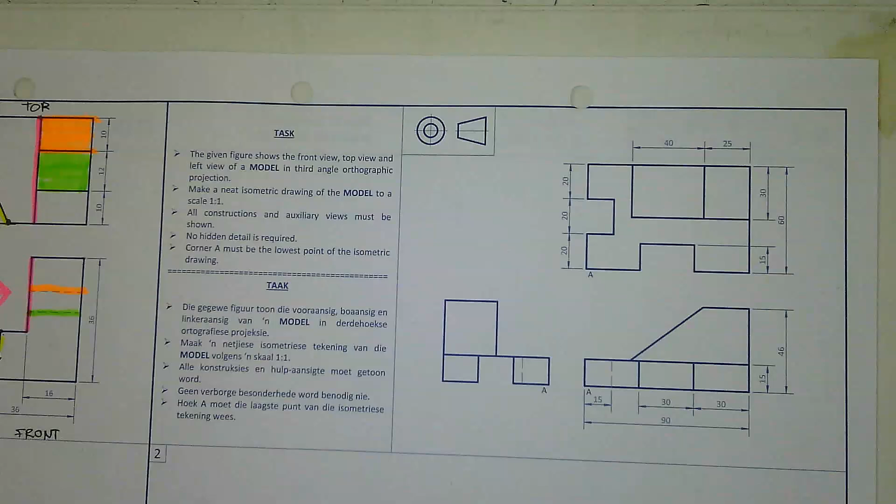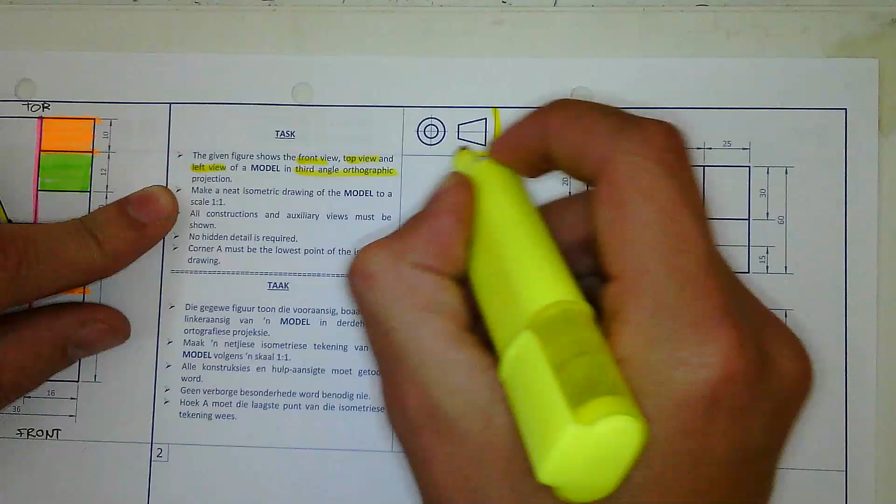Yes? Say again. 7-4, yes. HSE page 7-4. Okay, let's read through the question quickly. They've given us a front view, a top view, and a left view in third angle orthographic projection, and again there is your symbol. Now I want you to please answer this question for me.

Which one is my front view, my left view, and my top view? I'm going to label them A, B, and C. Which one is my front view? A. Which one is my left view? Which one is my top view? Okay, so everybody's happy? Okay.

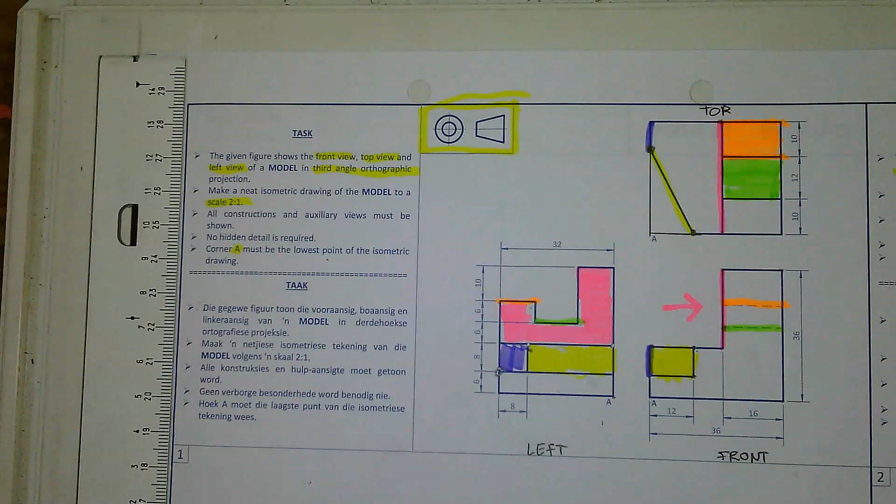Now, they've also told us that we must make a neat isometric drawing to a scale 1 to 1. Scale 1 to 1. I want you to notice, please, on this page, on drawing number 1, you use a scale of 2 to 1. Okay, so when you draw that one, just take note of that.

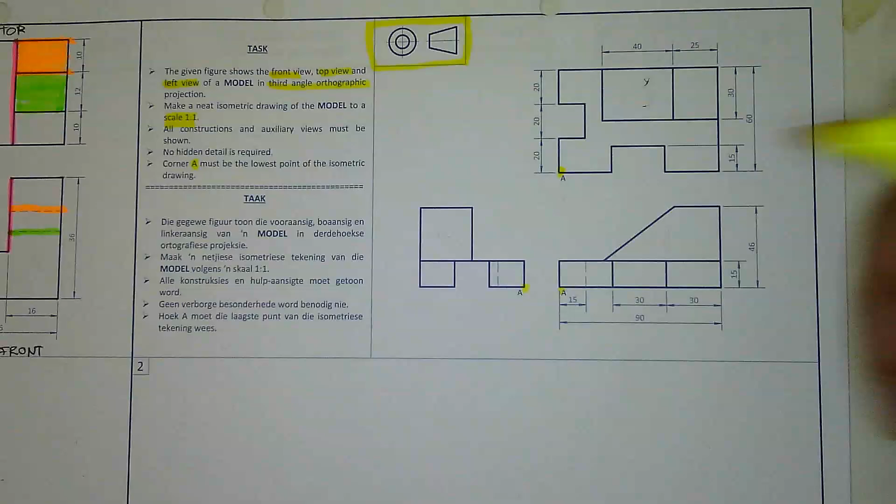And then they want us to show all constructions and auxiliary views. No hidden detail is required, and corner A again must be the lowest point in our drawing. There's corner A, I've just tapped it, so there, and there, that is where corner A is.

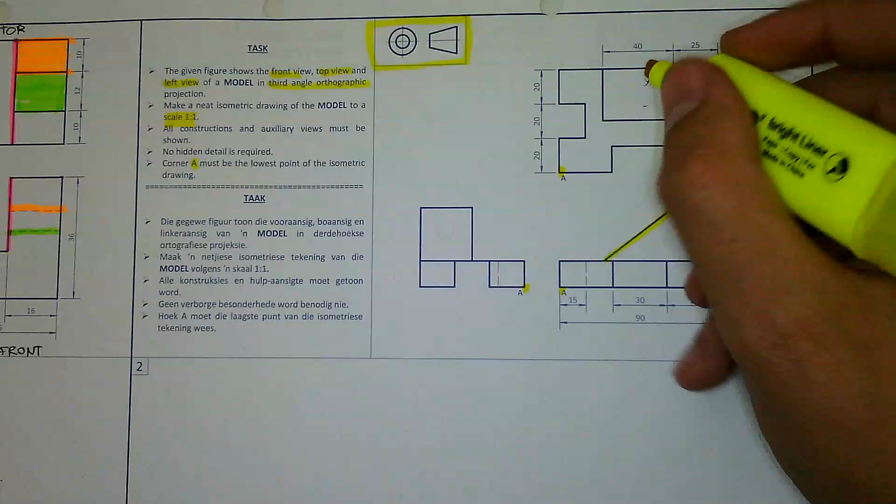So let's quickly look at our front view. So in our front view, we see two things. We see a slope, and we see the top part of that slope, right off the bat. So that slope is going to be where in my top view? It's going to be right there. Do you agree? That top part right there is going to be that flat surface in my top view. Do you agree?

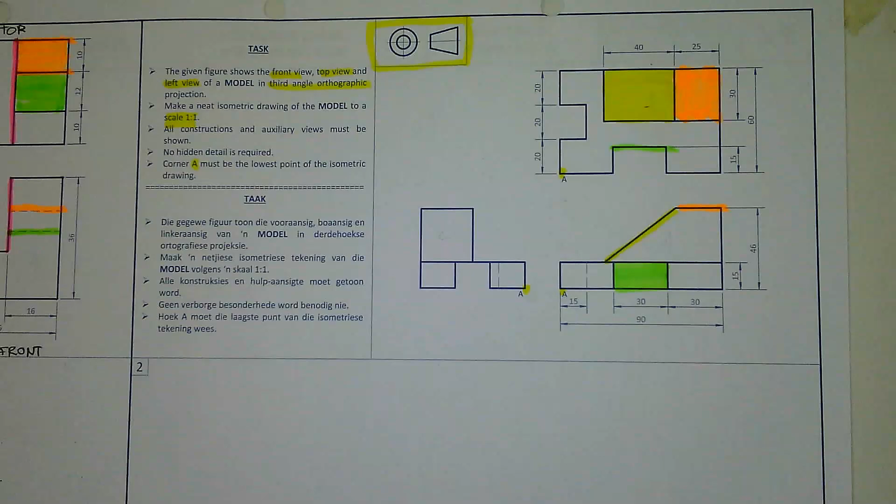Now, quickly pay attention to this. This surface right there, it's like a punch out almost. The line for that is going to be there in my top view. Do you agree? And then if I take my pink, those two lines, where are they going to be in my front view? They are going to be these two surfaces. No. So those two surfaces. Those two surfaces.

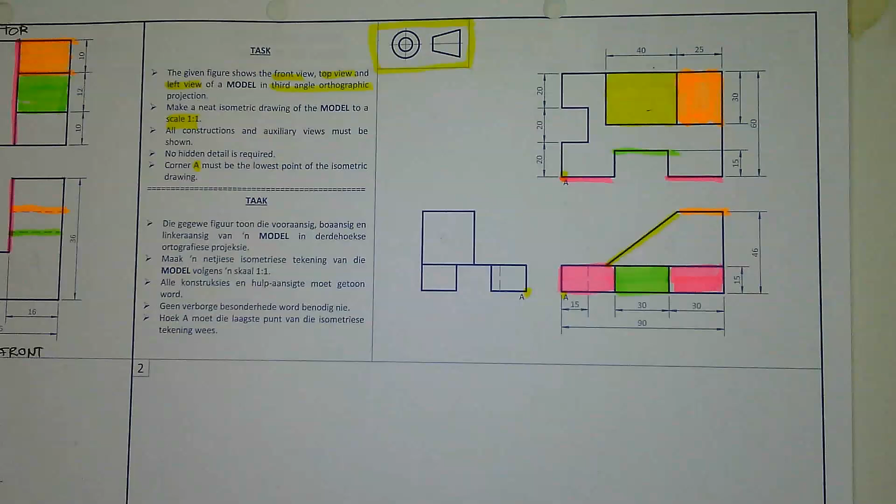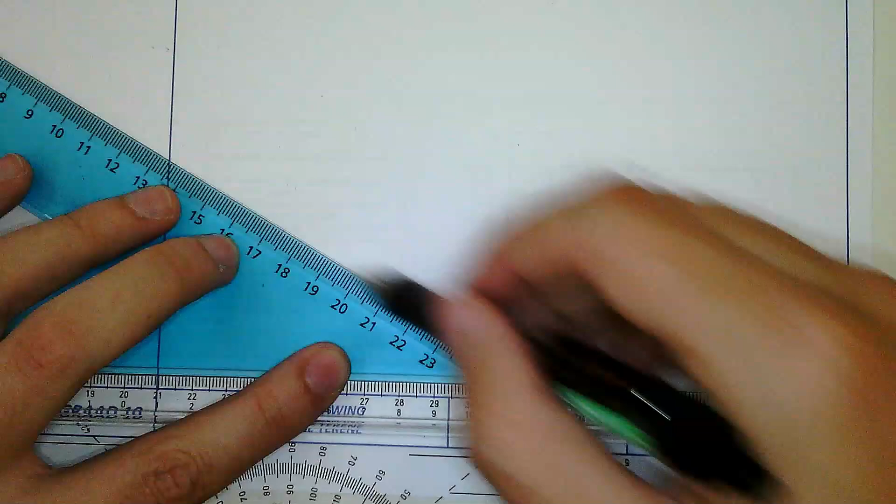Okay, so I'm going to stop there for now, and then I'm going to start drawing. So I'm going to go to point A quickly. Remember, all of our isometric drawings start with a 30-degree line going up and to the left and up and to the right. And then we have a line going straight up. So if I stand right there, I have to see my front view. If I stand and look at it from there, I'm going to have to see my left view. Everybody happy? Okay.

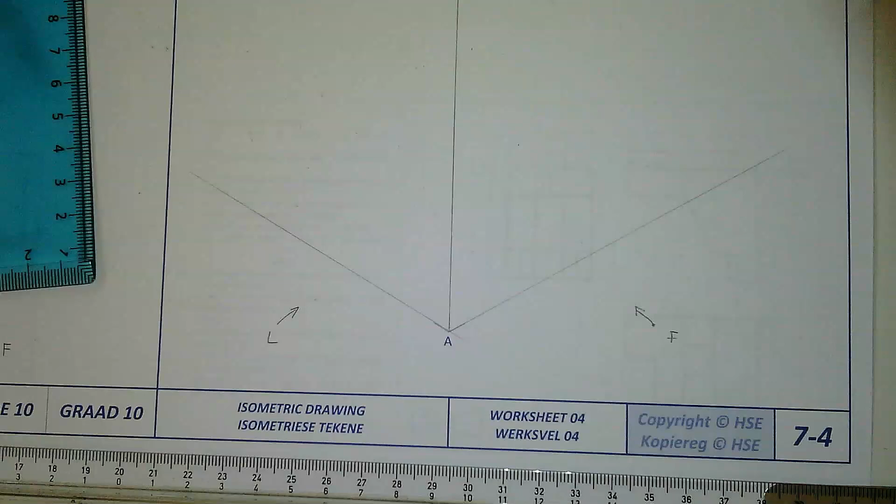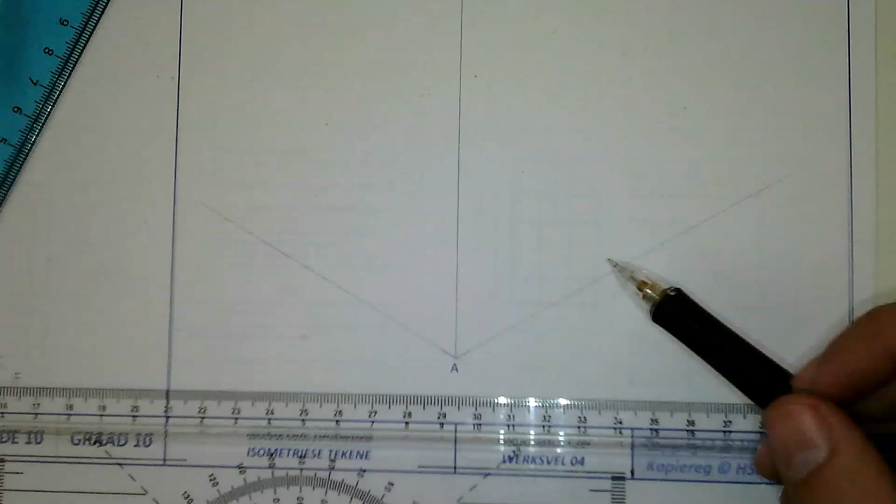Alright, so now I'm going to start with my front view. Where's my front view going to have to be? You said it's going to have to be somewhere on this side. So our front view has to be somewhere on this side. So the first thing that I'm going to do is go to corner A, and I'm going to draw that surface right there. I'm going to get the height of that surface first.

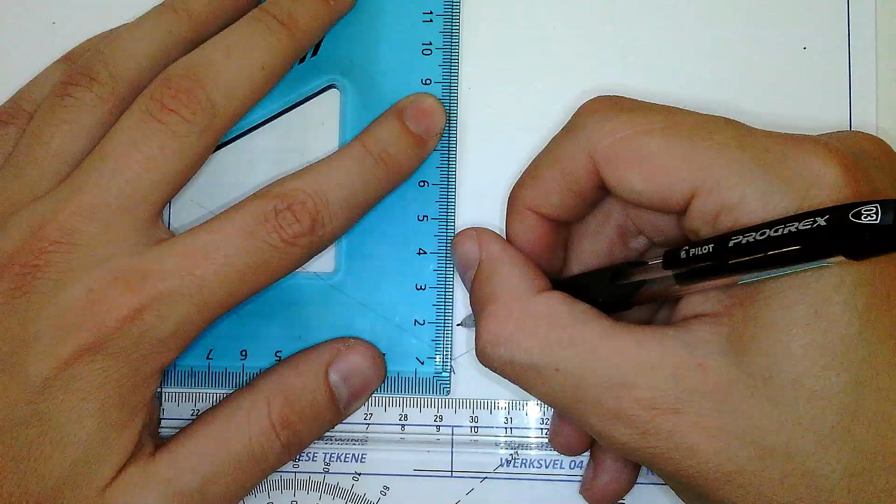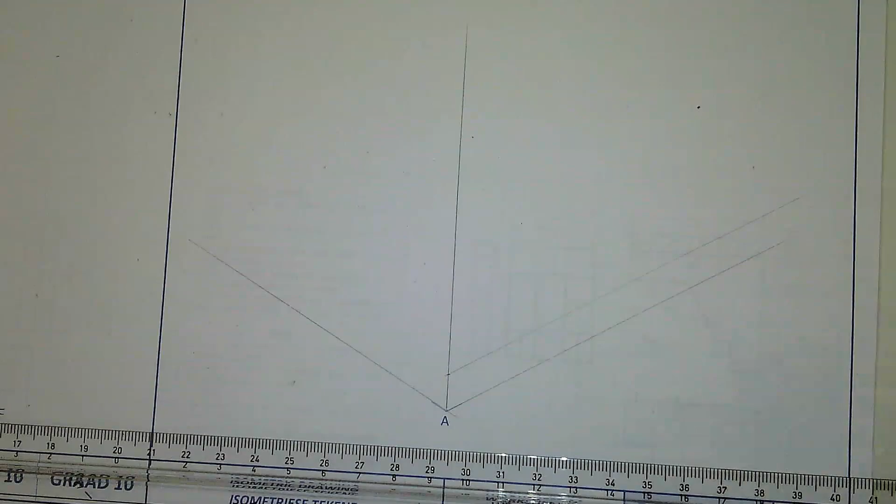What is the height there? It's given as 15. So I'm going to go to the base right there, and I'm going to measure 15. Make a mark right there, and I'm going to extend that mark up and to the right. Now, what is the total length from there to there? 90. Okay, so I'm going to measure these two lines to be 90. One, two, three, 4, 5, 6, 7, 8, 9. 90 right there.

Okay, so let's start with those two pink surfaces right there. They are both given as 30. So how do I know this one is also 30? I can just double check it because if I take 90, minus 30, minus 30, what's going to be left? 30. Okay, so both of these have a width of 30.

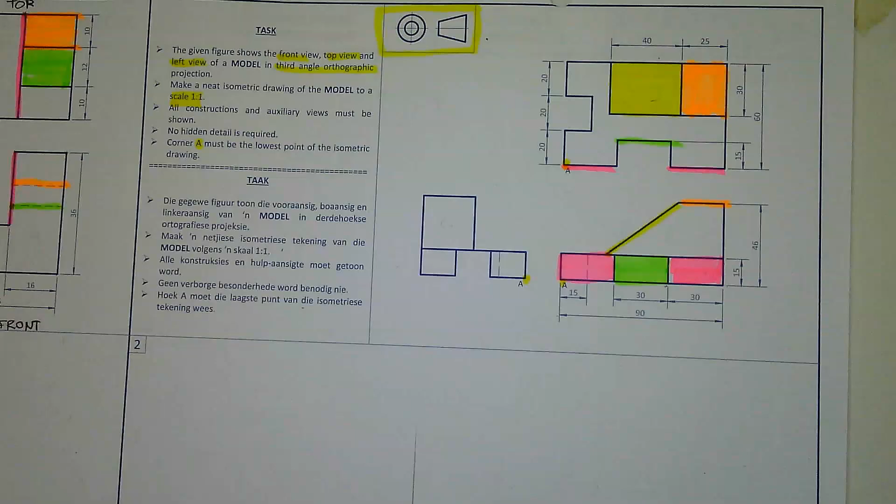So I'm going to go to that corner, measure 30, and I'm going to go to that corner right there and again measure 30. And I can draw lines down from them and I can make these lines hard. See that?

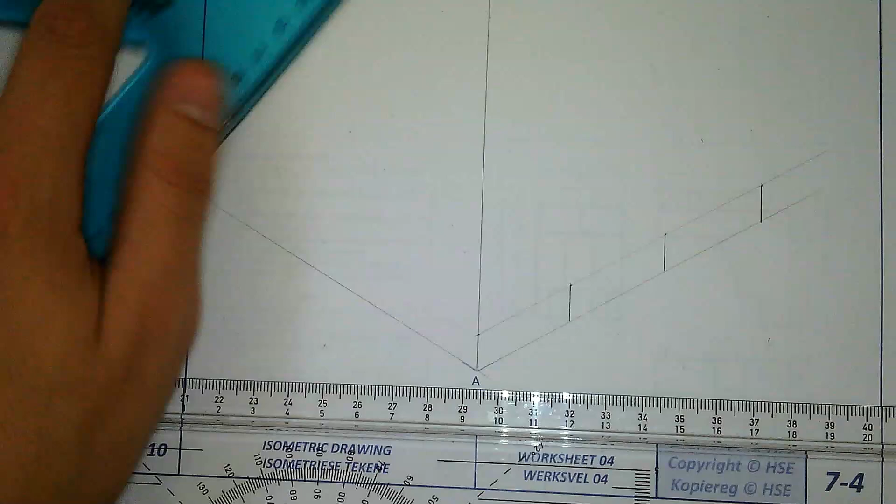Okay. So I have these two surfaces. I have those two pink surfaces. They are there. I can draw them in with a hard line. They are permanent. Everybody's happy. Now I want to quickly have a look at this punch out right there. How am I going to get this punch out?

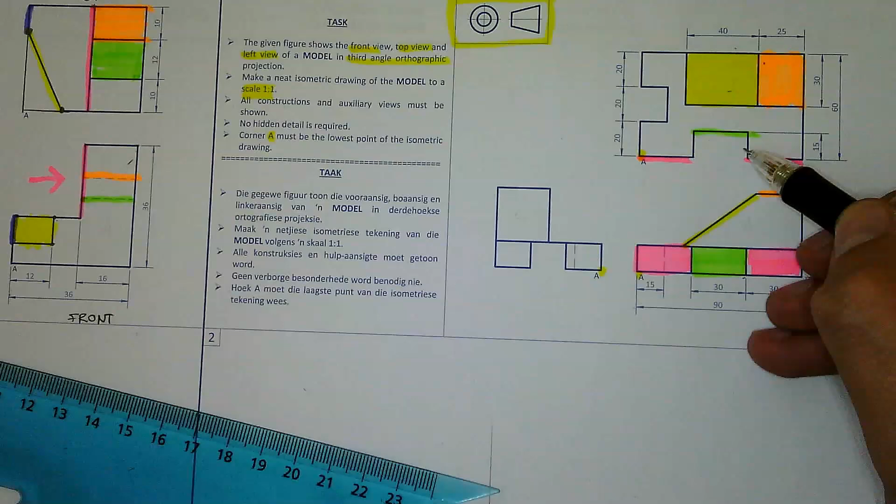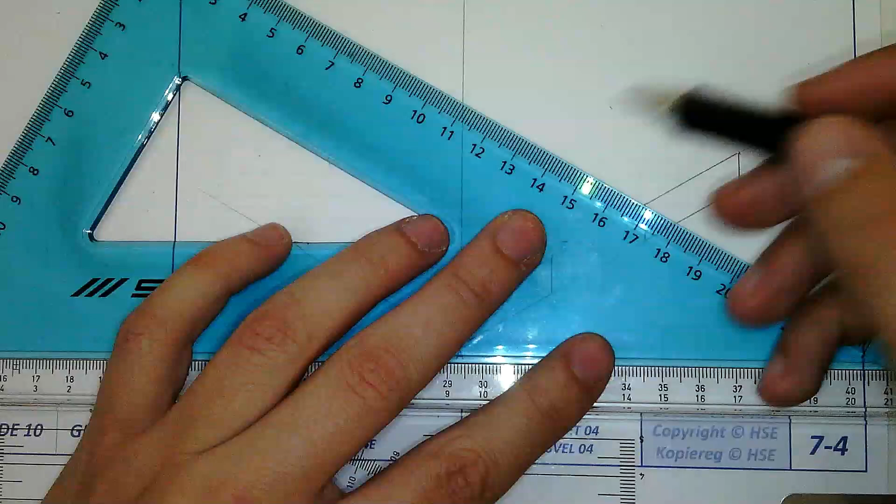It's given to me with a depth of 15. Okay, do you see that? We have a depth of 15 there. So I'm going to go to my drawing, and from that corner right there, draw a line that goes to the left. Okay, and I'm going to measure that line to be 15.

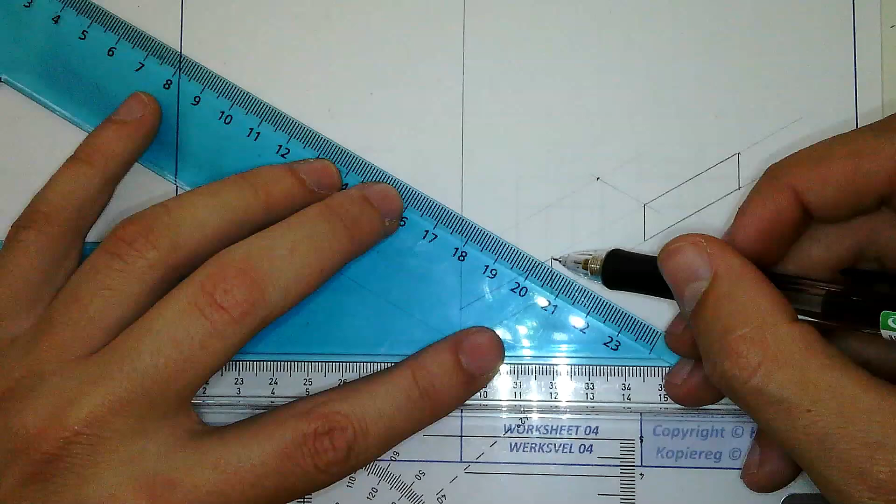So, a quick way to make sure that everything lines up without doing any other measurements. I'm going to go to that point that I've just created, extend it down into the left, and go to that corner and extend it up into the left. Can you see? Now I've connected all of those lines and I have created my punch out.

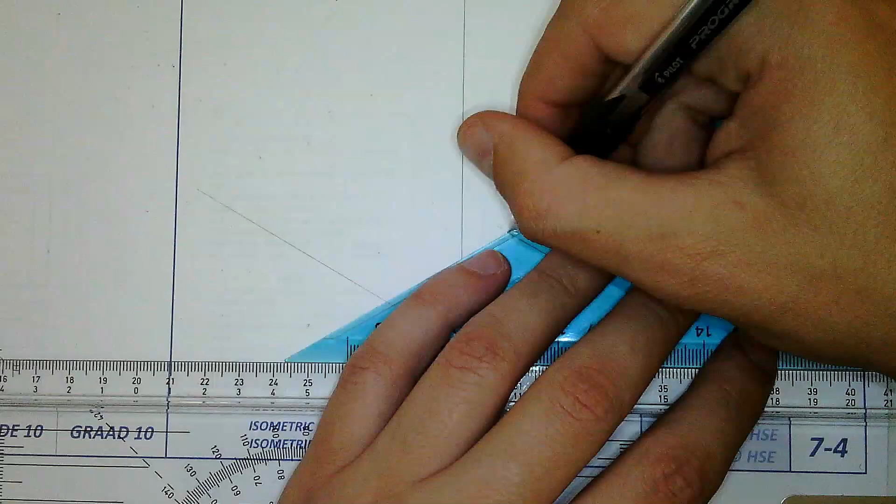How did I get 15? I got 15 from this section or from my top view. So can you see there the distance is given as 15. You see that? Okay. So now I'm going to go back to this drawing. I'm going to finish off this punch out. How am I going to do that?

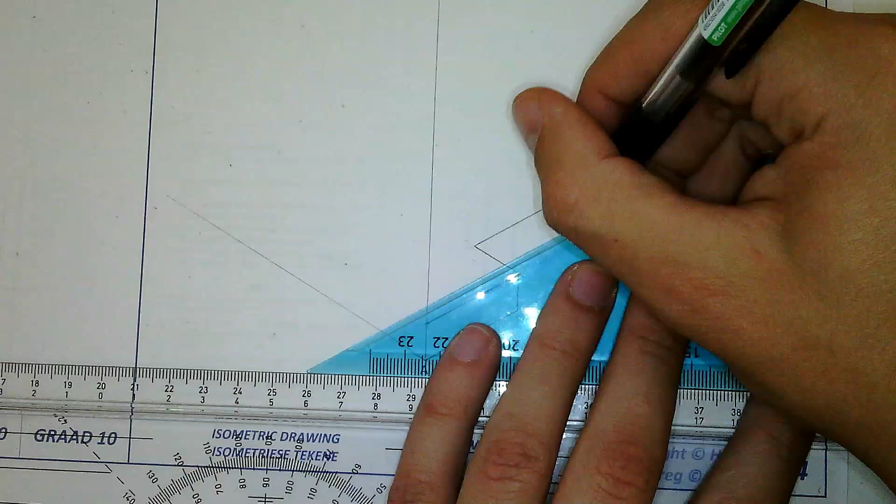From that corner, I want everybody to quickly pay attention now. From that corner, I'm going to draw a line up and to the left. And then from that corner, I'm going to draw a line straight down until they intercept. And then I can draw a line from there all the way to that line because that is going to disappear. Okay.

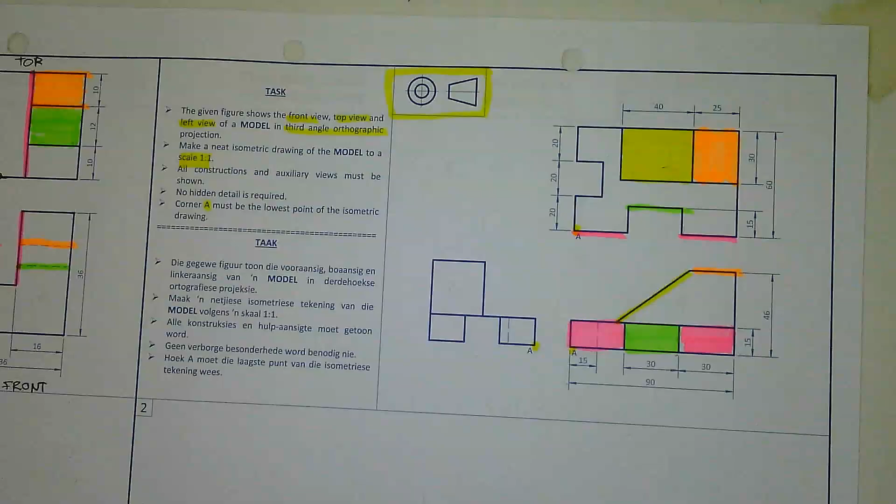Okay, so now I've created that little section right there. So I'm going to go on and draw my left view now. There's a mistake in the book. If you look at your left view, there should be a given line there. So you can just add that line in your left view.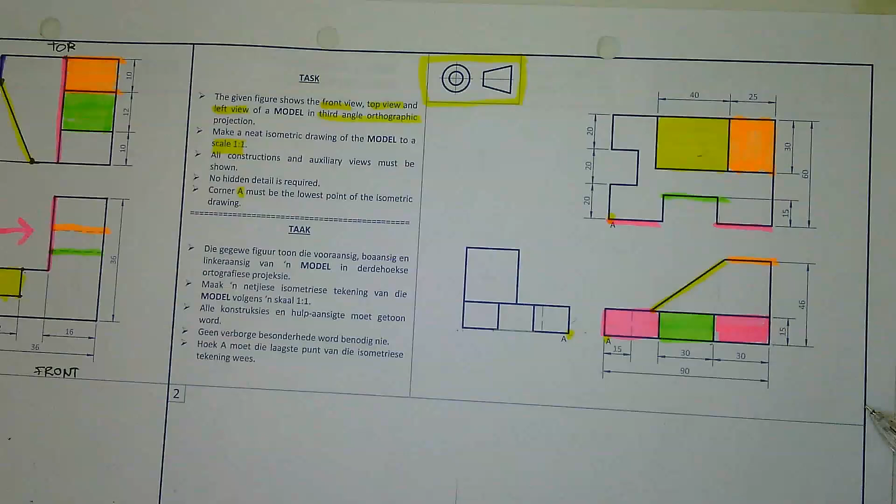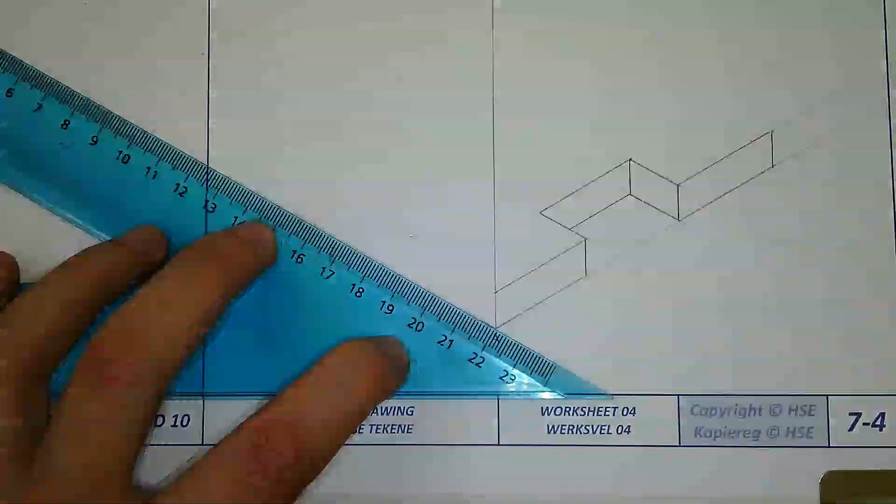Okay, so for my left view, what is the total length from there to there? What is the total length from there to there? 60, yes, because the length from there to there will be the same as there to there. Alright, so I'm going to go and measure 60 on that line. One, two, three, four, five, six. 60 right there.

While I'm here, I'm going to create all of these points. Look at all of these points quickly. They are spaced 20 mm apart from each other. So I'm going to go back to this line, there where I started to measure, place my ruler back at that spot, and I'm just going to make marks in 20mm increments.

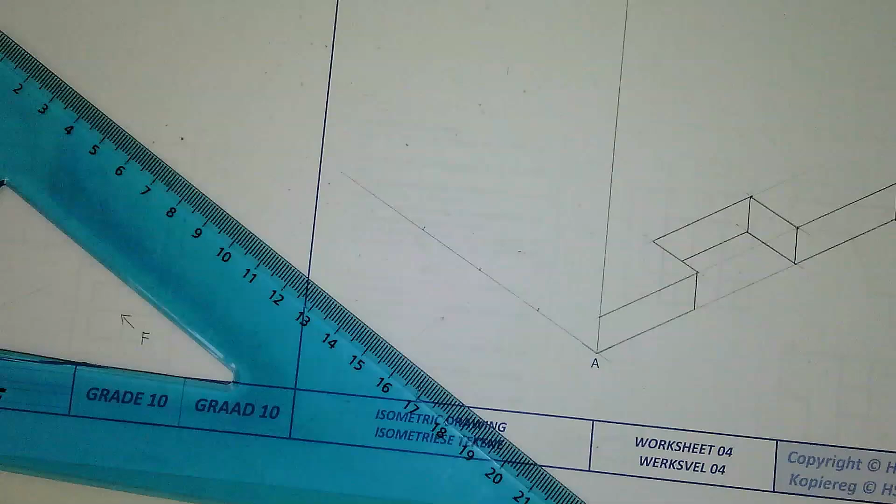And then again, to get the height here, I already have the height, because I've already drawn it in right there. I don't have to go measure anything again. So I can just go to that corner right there and draw a line up and to the left. And now I have a line indicating my height.

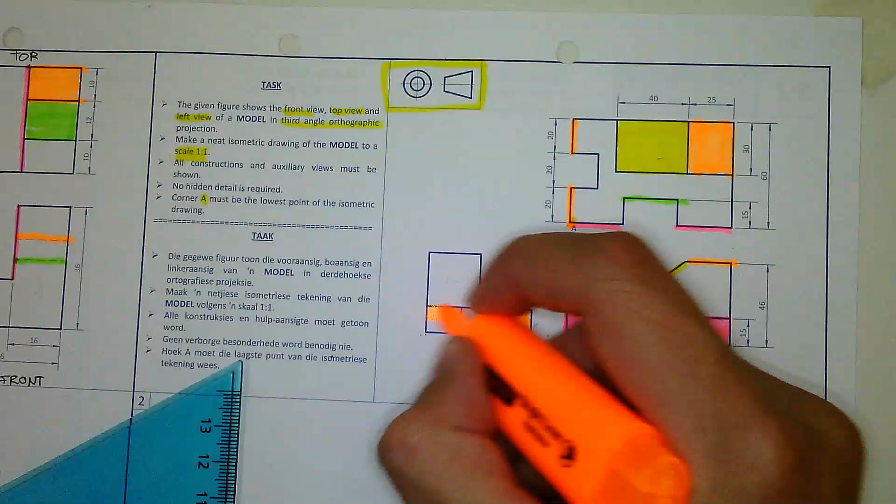Everybody quickly look at the board. Look at what I'm going to draw now. Do you see these two lines that I'm drawing in? Those orange lines. Where are they in my left view? Those are these surfaces. Do you agree? Where is that line in my left view? That will be this surface. And it's also going to be a punch out. It's going to have some depth to it.

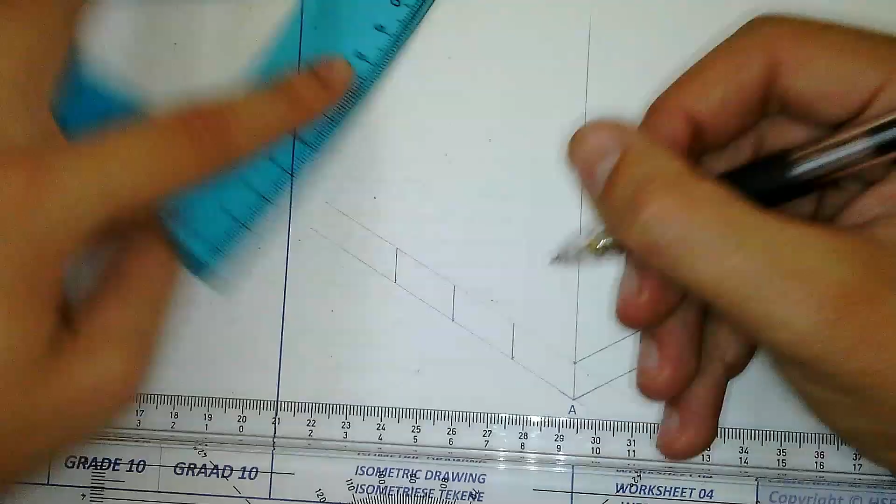Okay. So what am I going to do? I've already created those dots in 20mm increments. So I'm going to just draw a line up from all of them. Then I can create those two surfaces quickly. I know where they should be. So I'm going to draw in those lines with dark lines right off the bat. Okay, now we want to draw the punch out.

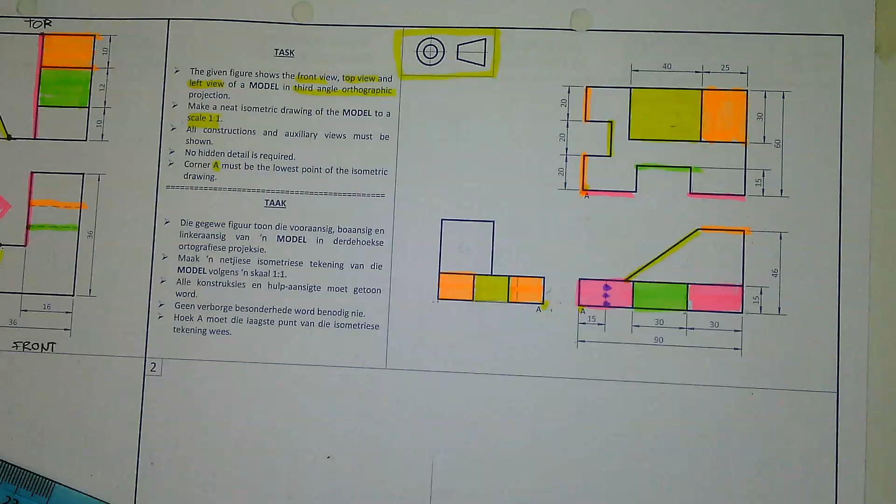This is where we're going to have to look at some hidden detail. If you look at your drawing, you'll see that you have a line right there that shows there's some form of hidden detail. That hidden detail line is going to give us the depth of that punch out. So what's the depth going to be? 15. Do you agree? So it's going to be 15 there.

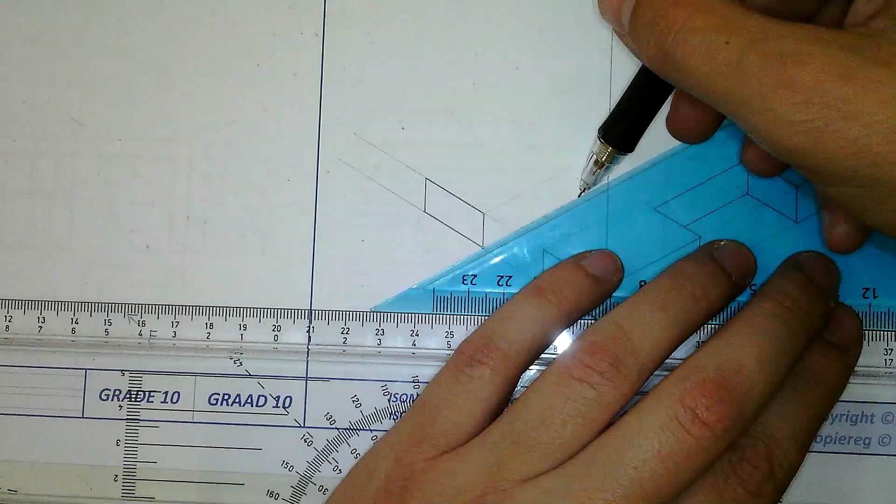So what am I going to do? I'm going to go back to my drawing, go to those two corners, and draw two lines up and to the left. I'm going to add this bottom one in as well, up and to the left. Now I'm going to go to the top one for now, and then I'm going to measure 15mm on that line.

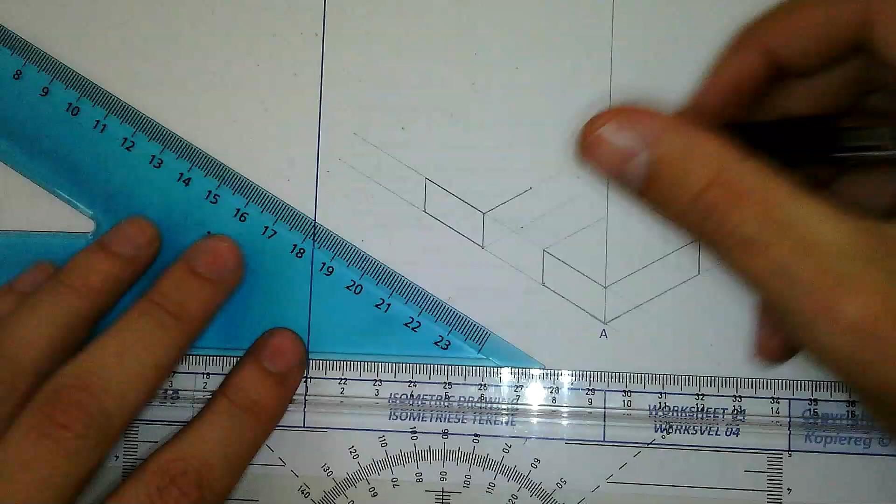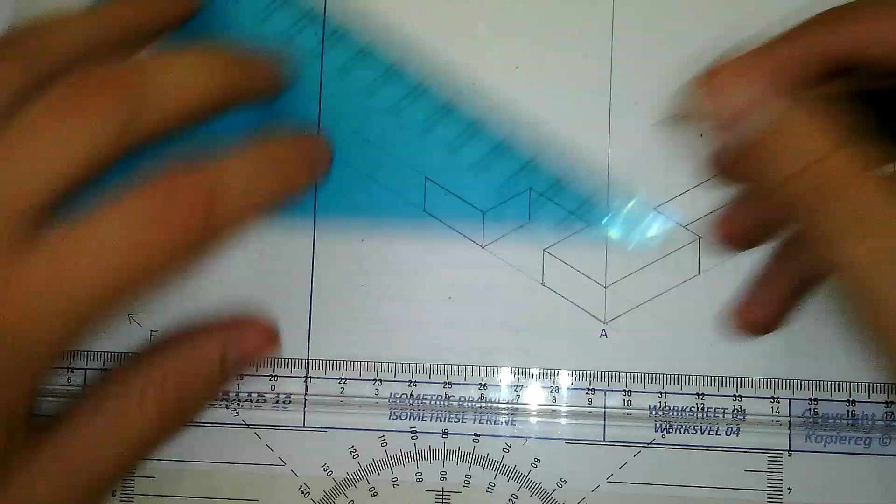Just like that. Okay, in order to close off that punch out, all I have to do is now extend that line until it touches this one that I've projected. Do you see that? And I can close that off. And all I have to do now is go to that corner, project it down until it touches the bottom line. And then I can complete my punch out. And again, this one is going to be projected until that point, and only that point, because it's going to be disappearing there. Okay, so now we have gotten somewhere.

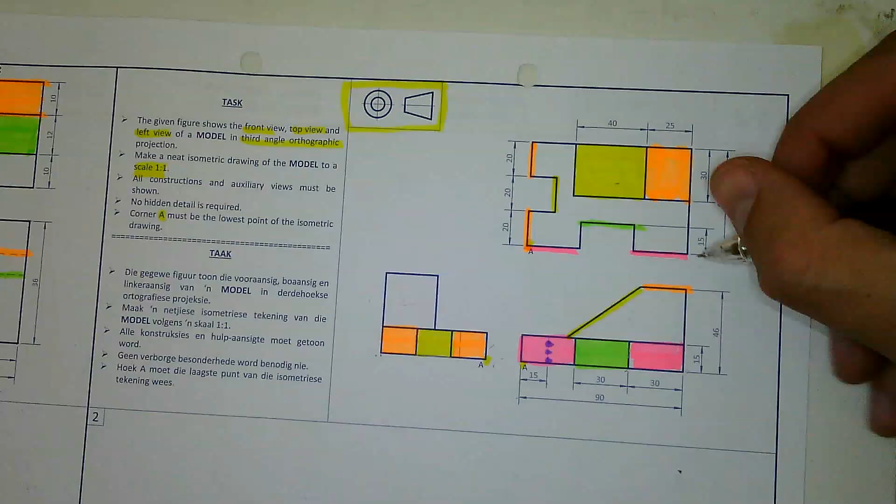The last thing that is left for us to do really is to draw in our slope. Okay, that wedge looking thing there. So what am I going to do? We have that point right there, because that point is given to us. Do you agree? So, since we have that point, all we have to do is find the distance from there to there. Do you agree? So, how are we going to find that distance? It's going to be 60 minus 30, which is going to be 30.

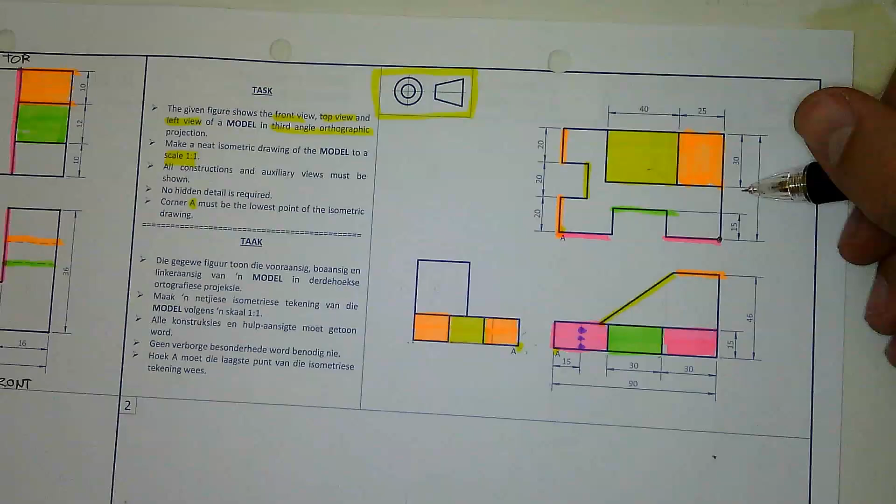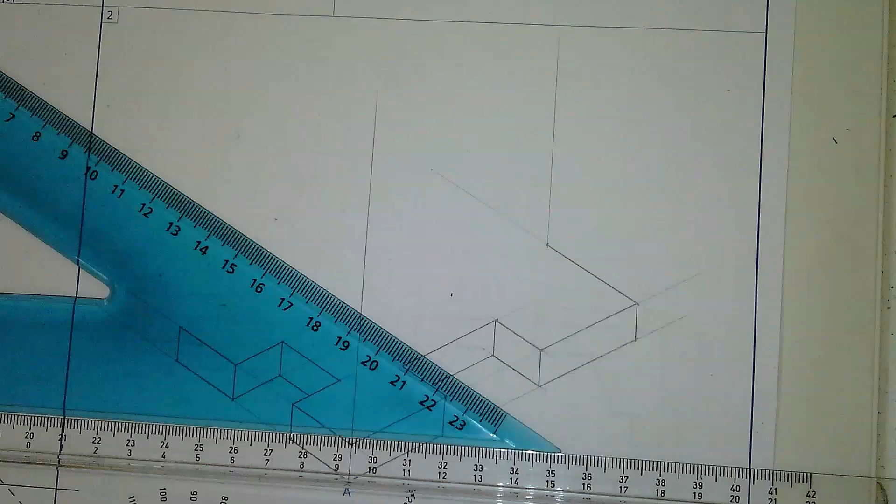So, what I'm going to do now is I'm going to go to that corner and I'm going to draw a line up and to the left. I'm going to measure that line to be 30. And I'm going to draw a light line going up from there. You'll see why in a second. Okay, so now I've drawn in that line. Remember that line that I've just drawn in, the one that goes straight up? Why have I drawn in that line? Because I can now draw that line right there in my front view. Okay, I can get that line.

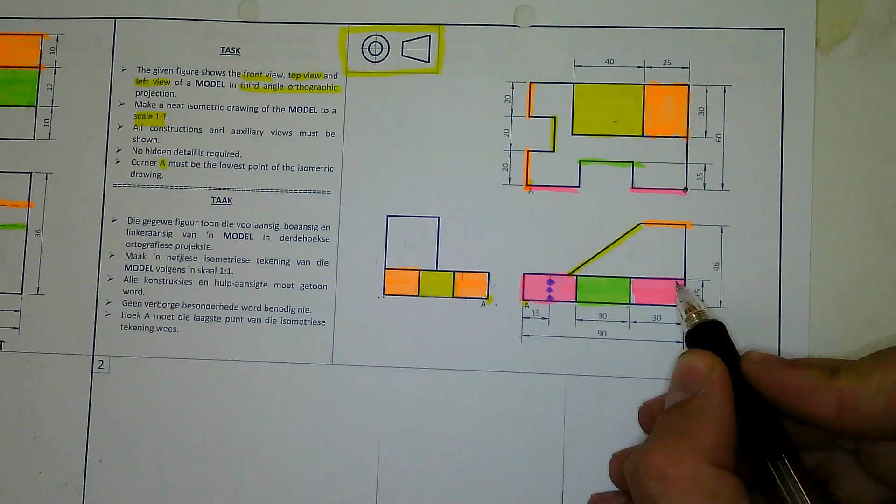How am I going to get that line? It's going to be 46 minus 15, which will give me 31. So I'm going to measure 31 on that line. And I can draw it in with a hard line for now. Quickly look at what I'm going to do now. From that corner, which is that corner right there, I'm going to draw this line. Okay, that line right there, which is 40. The length of that line is going to be 40 plus 25, which will be 65.

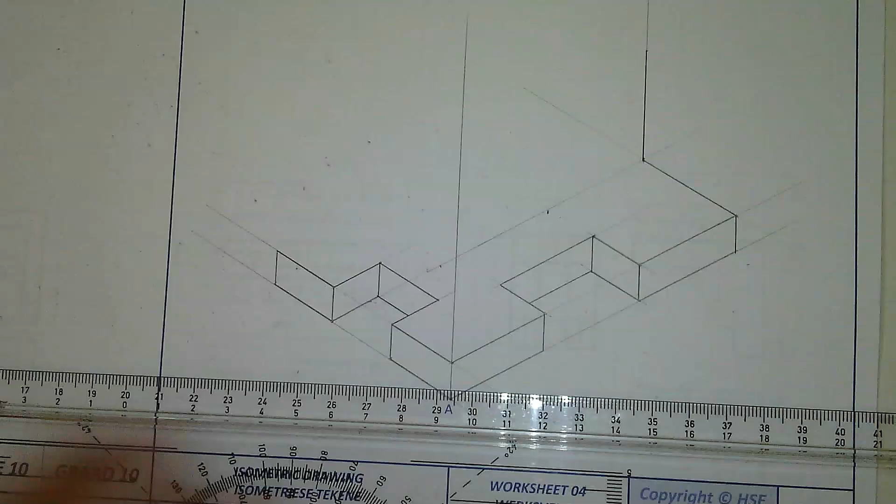So what I'm going to do is go to that corner. I'm going to draw a line that is 65 down and to the left. 1, 2, 3, 4, 5, 65. It's going to be somewhere there. I'm just going to have to extend it a little bit further. Okay, and I can draw that line in with the dark line. You'll see why in a second. Look at that line that I've just drawn in. That line is this line, but at the bottom. Do you understand?

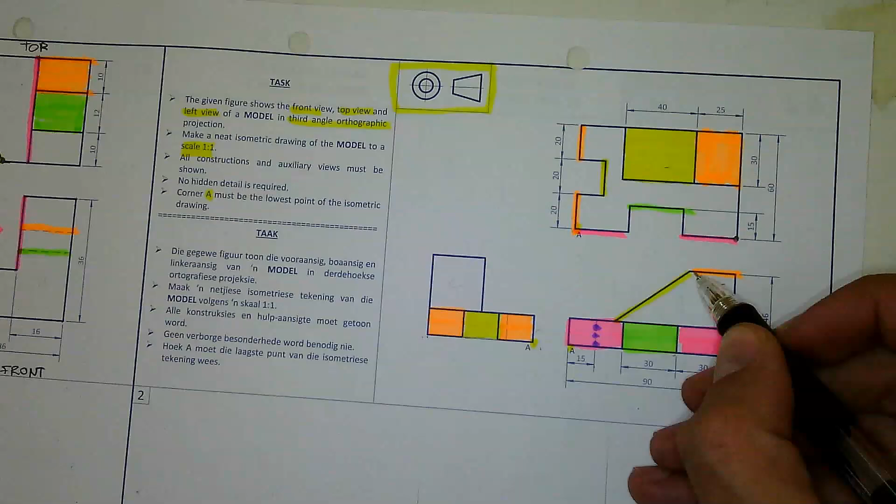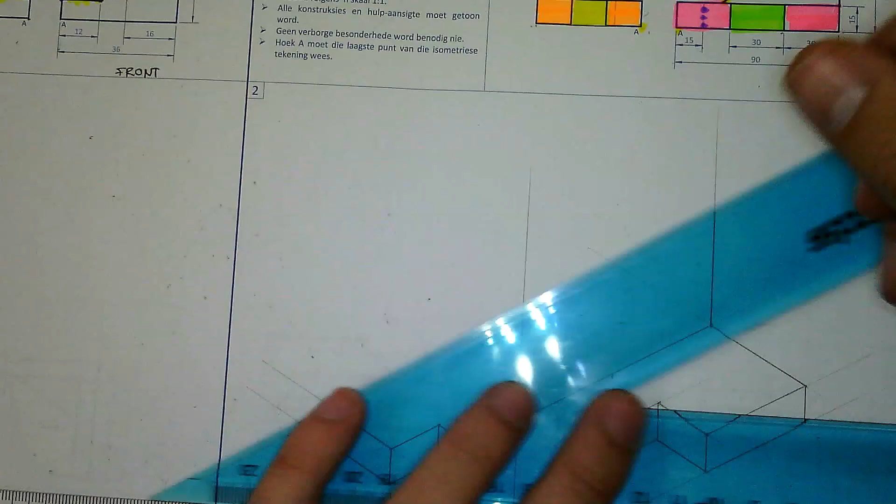Okay, so what do I have to do now? I am going to quickly create this slope. So to create a slope, I just have to get the distance from there to there, which is given as 25. So I can go to that point, draw a line down and to the left, measure to be 25. Okay, and all I have to do to create a slope is the following. We have that point right there and we have that point right there. All I have to do is connect them with my ruler and draw in that line. Just like that.

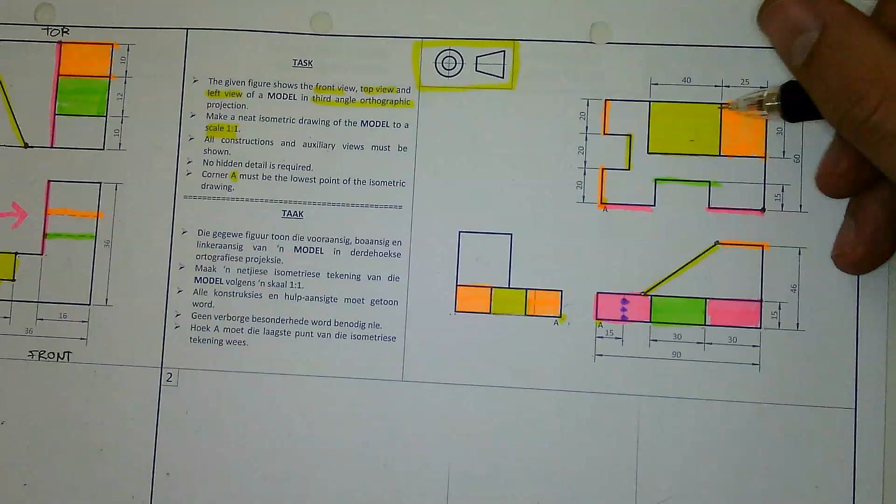Okay. Now I want to create the top section of the wedge, or whatever you want to call it. So again, we have a top flat section there that is given as 30 by 25. So from the top, I'm just going to draw a flat surface that is 30 by 25. 30 right there. And all I have to do to complete it, again, I extend all of my corners out until they intersect. Okay.

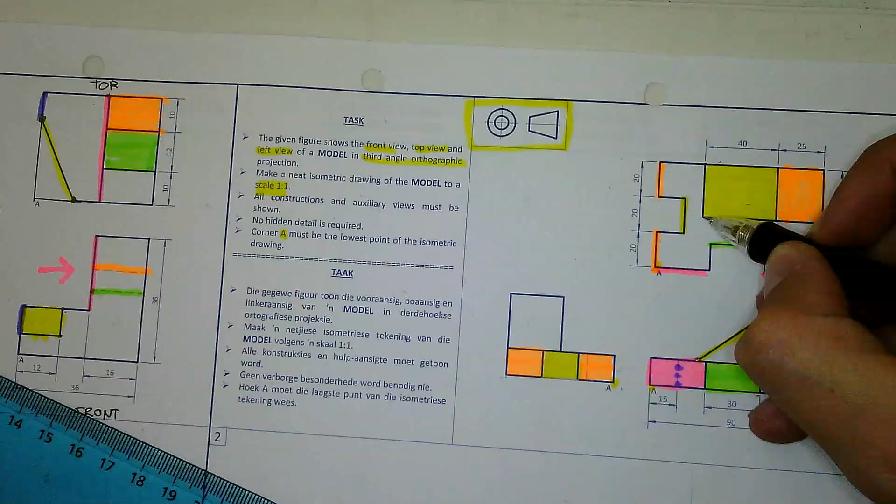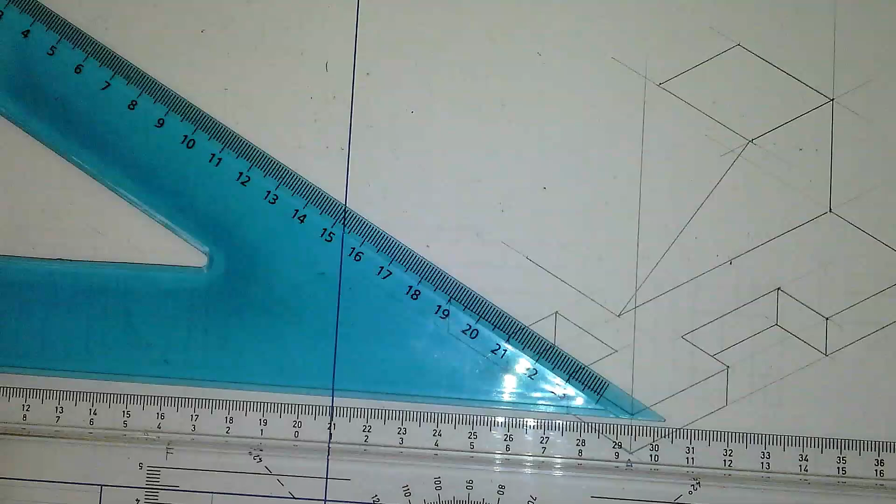And now I am going to have to find that corner right there. How do I find that corner? Well, I have that one. So in order to find that one, the distance is given as 30. So I'm going to measure from there to there and make that line 30. So from that corner right there, I'm going to go up and to the left and measure it to be 30. I can draw it in with a hard line. And again, all I have to do to complete the slope is connect those 2 points.

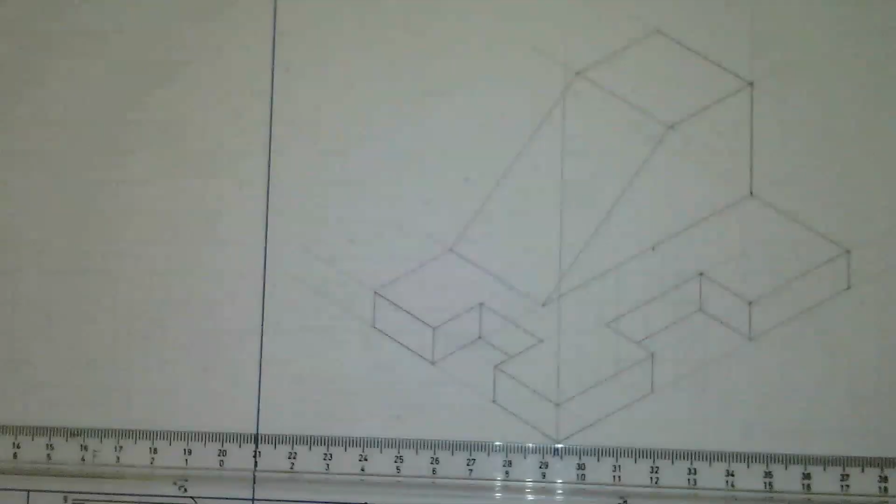Okay, and to finish off the drawing, all I have to do is draw in that line right there. And there's the memo. Okay. Any questions? Okay.